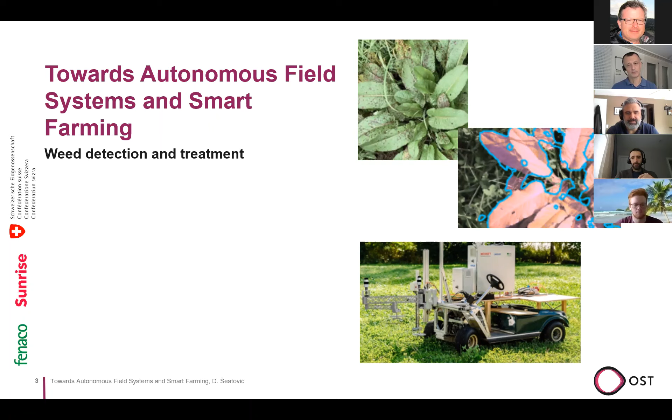What I'm going to try today is to give you kind of an introduction into farming. Not that we are going to do any kind of herbology, but nowadays we know that the production of food takes really a lot of resources of our nature. And what we want to do is to show a use case, a quite complicated use case, which can then be scaled to bigger machines and help us get autonomous systems working on the fields. So conventional farming is on the edge of change. The paradigm changes in food production and also environment protection, especially in Europe.

Each farmer has to do some kind of weed control, and they do it nowadays with biocides or herbicides in this case. And they are searching desperately for new tools where they don't have to put poison in the field. Then automatic weed detection, that's a topic which is more or less as old as computer vision. And we know in the 50s, people thought that in 10 years the computers would think as humans, which we still don't have.

But what we have now is the technology and computing power to put new generation machines on the field so that we can achieve a similar productivity level as conventional farmers do, but not on very, very large fields. This is still a domain of conventional farming. And I will show you some building blocks of our autonomous weeding system and the challenges which are there.

And there are not few, there are many. Then I'll give you a little glimpse into our new project, which started this autumn, on how to make money with a weeding system. So let's see first, what is conventional agriculture?

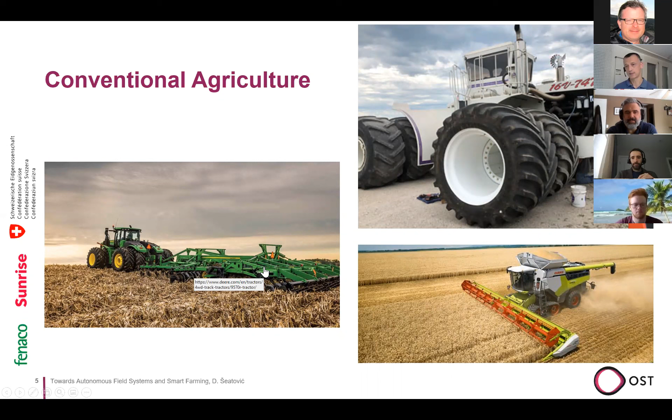Then, as I said, we have weed treatment, which is spreading herbicide in the field. What you see here is a new machine from the company Agrifac, which has smart nozzles. Those smart nozzles apply herbicide on the exact spot identified by the farmer. When the farmer says, do this on that spot, this is where you're going to apply the herbicide, they do the application. They use GNSS antennas to precisely and accurately determine where the weed is located, and they spray. Those sprays are not exactly saving herbicide, they spray quite a lot. You can see almost the whole field is wet from the application.

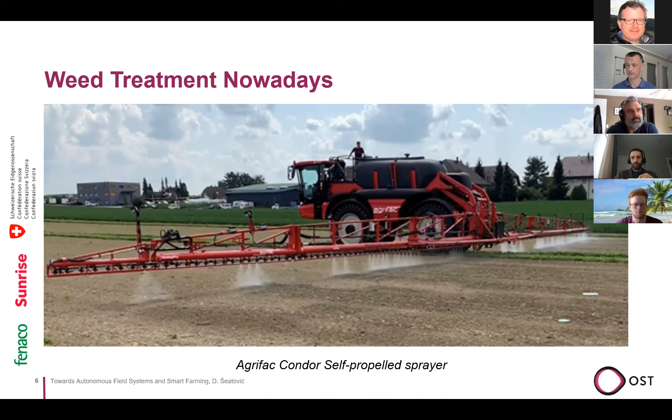So this is called precision farming. Well, precision means you can see within half a meter wide, so that you still get the plant or the leaves processed. In the end, it saves maybe 30% of the herbicides during that procedure. However, it's an improvement. Now each farmer has to make a decision.

Am I going to do conventional farming, or am I going to do organic farming? Conventional farming allows big scales, a lot of production, massive food production, or whatever kind of production is needed. With mechanization and automation, which I just showed before, those farmers can really produce for very little money. We'll see why.

The field machines are all steered by GNSS, and companies like Claas and John Deere cover the whole chain from planning, seeding, plowing, weeding, and then harvesting. Everything there is made to be as effective as possible with as little human interaction as possible. So they are assisting systems. They are big, and they compact the soil quite strongly.

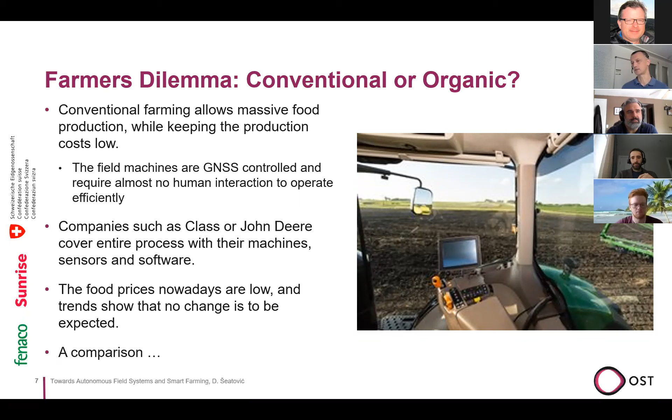And the farmer must produce more and more food, or more and more of his products, to keep his enterprise alive, since food prices are very low. And there's no trend showing that conventional food production prices are going to increase in any way.

Even more astonishing is where wheat production actually happens, especially in North America, where labor prices are not that low, like in South America, Africa, or China. Still, Russia also produces a lot of wheat, and labor there is much cheaper. But I mean, $6.50, and for what, 50 years? This is kind of weird. Everything else gets more expensive.

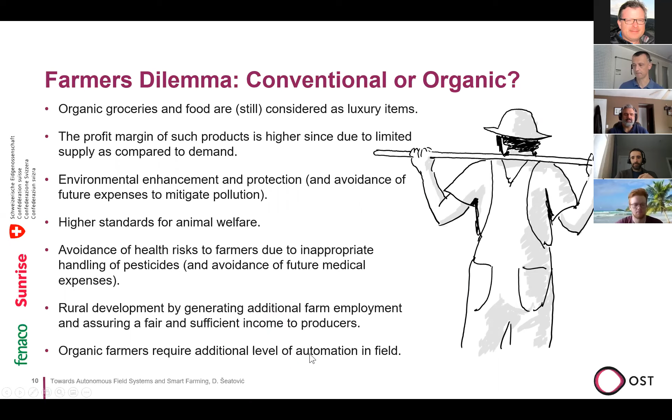But if they want to really be competitive, they need an additional level of automation in the field. Now, what can a farmer do?

He can do arable crops, which are really large fields like sunflowers or wheat. He can do vegetables or olericulture - this is a kind of a little bit more trouble, not so easy to harvest, so you have a lot of manual labor inside. Or you can produce meat, which is nowadays also a little bit bad, but still you can just put the cattle on the meadow and sell the meat there. So it's quite good income for doing this.

But if it comes to wheat, and the farmer has to assure that the weed is not competing with his product, then he cannot compete with a conventional farmer. A conventional farmer can do 5 hectares within the hour, and an organic farmer needs like a week for that. So how can we enable that?

So let's do it a little bit animated. Whenever we get on each of the sites, we get weed. And weed control is crucial for any cultivation art - it's almost as important as fertilization. And if they fertilize and have competitive weed, then the weed will also grow faster. So we need to keep the weed as low as possible for as long as possible.

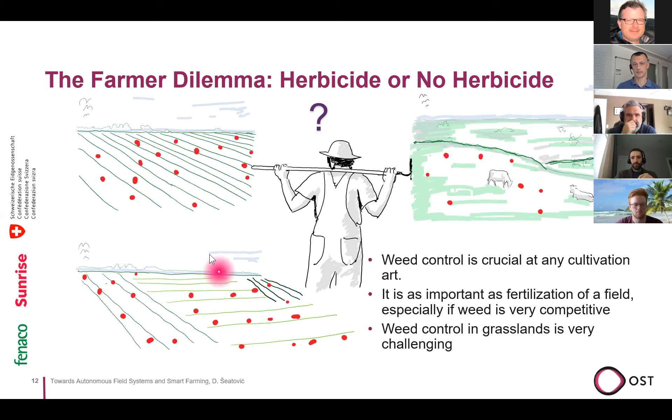So we started that in 2006, and we thought at that time that passive sensors - so a vision camera - was no go; they give us more reliable, more accurate data. With passive sensors, we shouldn't go there. Then we had a good effect if we have a third dimension, so we can actually better segment objects from the image.

We can estimate the surface of the objects or leaves in the area, because then we can distinguish which plant is what, based on the shape of the leaf or of the patch we're seeing. And with that, we can also see certain features on the field which are not actually seeable on a simple vision camera. We use a lot of hard-coded algorithms and manual feature engineering, and we saw no GNSS necessity, so it should be kind of a real-time system.

Now, how was that? So we use a flatbed scanner to get our samples. We used the flatbed scanner, then we created a blob. Then from that blob, we extracted the border.

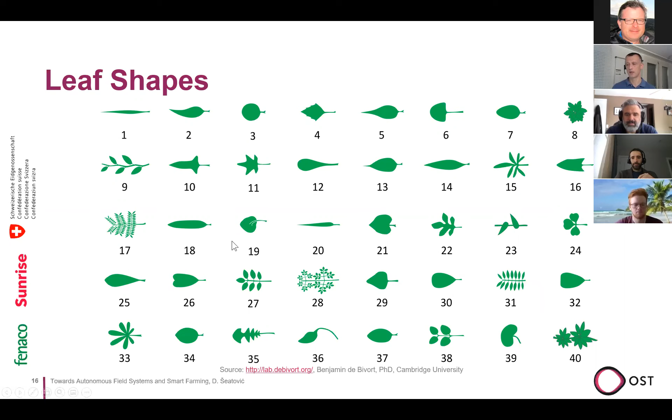So we had the different leaf shapes categorized into 40 classes. And then we did the analysis of how much and how well those shapes can be distinguished from each other. So simple analysis, the Mahalanobis distance between the leaf shapes from those feature vectors, gave us a quite...

So this distinction between the leaf shapes is promising. Then we saw the features - these elliptic Fourier descriptors, they give us just like a power spectra of the curve.

And then we saw, well, the correlation between those features is not big. So the first 10 are really good to do the discrimination. And the rest of them, they have such a high correlation that we might want to neglect them for our machine learning.

Those days we used the support vector machine, and it might actually make us more noise or more trouble than actually use. In the end, we used 35, which was kind of a middle decision - that's where we stopped actually.

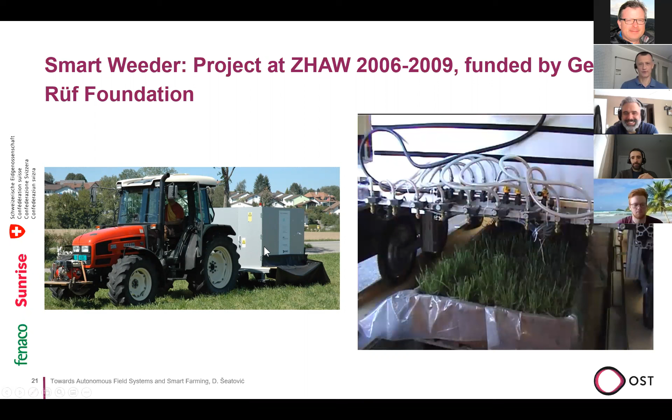So this vehicle which you see now, this was our Borg vehicle. I call it that because it's a kind of a cube, and it was like 300 kilos heavy, and we had a really strong laser inside, so that everybody had to wear our glasses just to do the measurements.

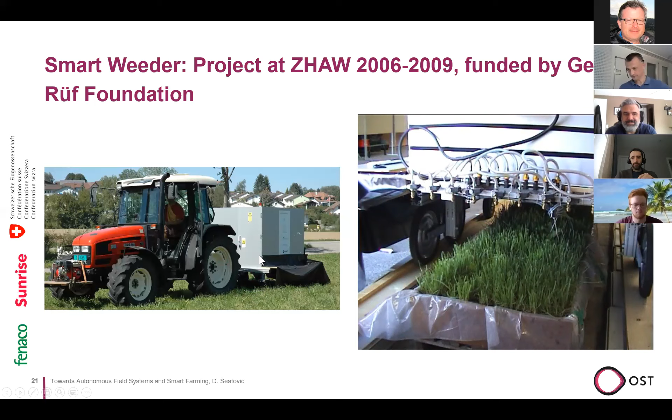And when we analyzed that, the algorithm was able to extract certain patches depending on their size and orientation. And then we extracted the boundaries, and then we got the matching, and some things where they were really near to each other didn't fulfill all the conditions to say, okay, this is a kind of weed leaf.

But when we discovered at least one weed leaf, we could say, okay, in this area, other candidates might be there too. So we were really detecting more than 85% of the plants by detecting more than 65% of the leaves.

So it was, let's say, disappointing. Disappointing also that we didn't meet the speed which was necessary - it was 1 meter per second, so we were like 0.7 meters per second. And what we had trouble with was the computation power in the field.

Yes, that was really a showstopper, because our computer wasn't able to just process the 4 GB of data per second doing all these computations. And yes, the sensor lacked reliability. So that's why we actually thought, well, that's a nice idea, but we have to wait for better sensors. And the commercialization of such a system was, let's say, impossible.

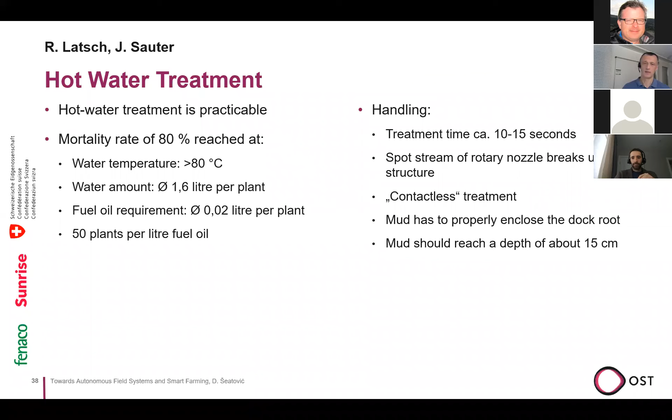This spot stream rotary nozzle is really necessary because it breaks the ground and propagates the hot water into the root. We have to dive 15 centimeters deep and then actually boil the plant. If you get the temperature above 80 degrees, the plant dies. Then they optimized that unit with 2 nozzles and a rotating system, so that we can drill the hole with a hot water stream, with 130 bars or 13 megapascals at 90 degrees Celsius coming from those nozzles simultaneously. Now, we are developing a new, more convenient treatment unit, which will be much faster, and we assume we will get 5 to 6 seconds.

We will be able to kill each of those weeds, and we can scale it in size. And now what we also developed as student work: we developed a new SCARA robotic system, also ROS-based, where we can use this arm to position it over the plant.

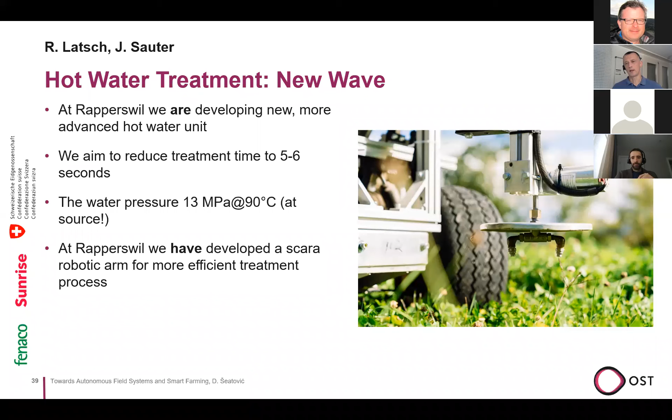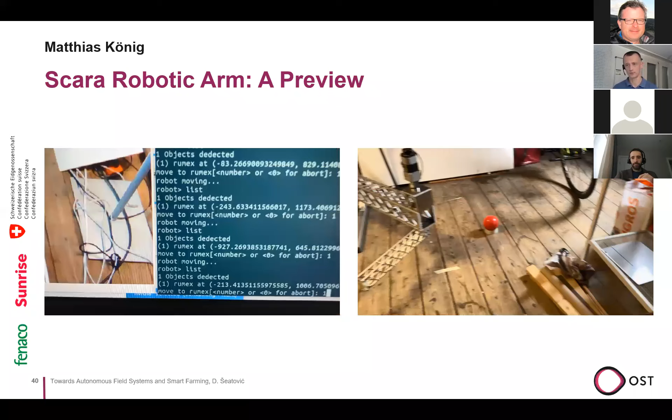Why we did this is that navigating a 900 kilo vehicle 3 centimeters accurately over the plant is kind of tricky, especially if you have Ackermann steering and so on. So it's not very convenient to do this. But what we can do, and we couldn't go into the field, so this was kind of a proof of concept whether the arm is really positioning very well.

So also we have a concept of root tracking developed by Damian Schori and the same student which you've seen before, which means we are able to track the roots from the video. So we can use a very cheap system like the NVIDIA Jetson Nano or any other inference system to track the position of the root in the image, and with certain information, maybe a 3D time-of-flight sensor there, we can actually project that into the robotic arm space.

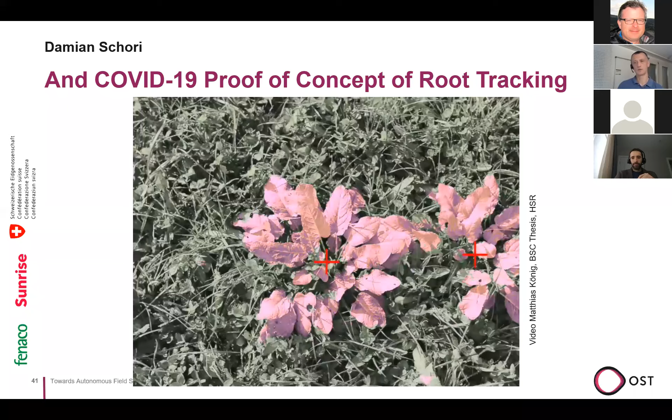And having that projected, we can do this detection also online, so without the UAVs, but we can also accelerate the processing time, since we position our vehicle near the plants, and then we can do processing on each plant with the robotic arm. This makes the whole story much easier, since the arm has a reach of approximately 1.2 meters.

This robotic arm can withstand 800 newtons of force, so it's a kind of robust technology which we need in the field. And we can put 40 kilograms on the tool tip. So we also have a sufficiently fast robotic arm. It can move not very precisely, but fast enough that we can actually say, all right, we have a proof of concept. If you want to do this speed and weight optimized, then we have to start another project.

But still, we are able to position the TCP, the tool center point, using this static camera visual servoing system so that we are really 3 centimeters above the root of the plant. So the main gain of this is that the vehicle doesn't have to navigate 3 centimeters accurately.

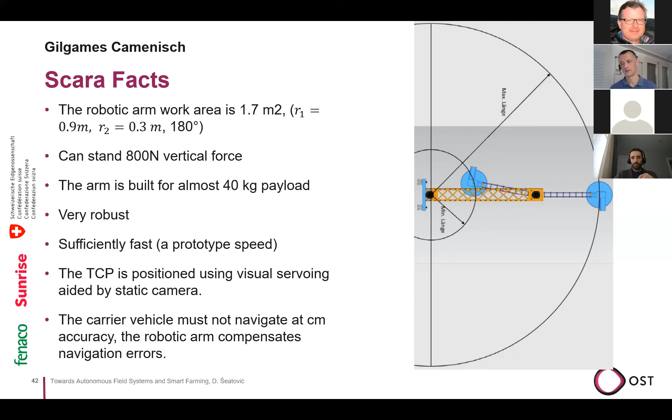And if we bought those elements at industrial partner prices, it would be kind of double the price. But with 1,500 hours of student work, we have a position accuracy of 3 centimeters, so we know our position and orientation 3 centimeters accurately. But you don't need that, because we need just 30 to 50 centimeters, depending on when the occlusions come and so on. So it's not a big trouble, because our SCARA robotic arm can do this.

Our biggest trouble is strong EM interference, because we have 400 volts here, and the controls and everything here interfere with the GPS signal. And really controlling this vehicle autonomously when it drives over the meadow is really challenging, the speed is really challenging, because it works mechanically, but we are mechanical engineers.

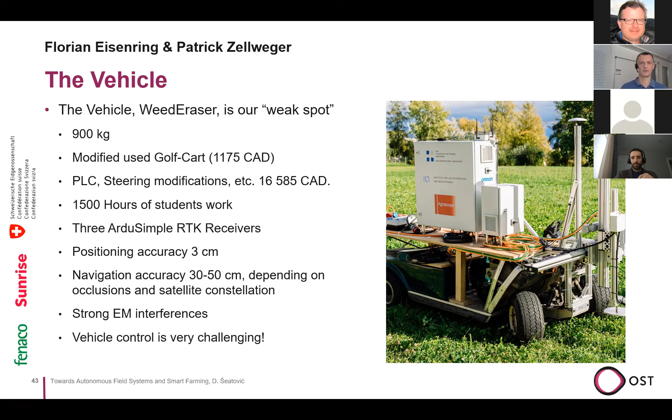Because we want to use commercially available systems. We want to use off-the-shelf components, because this makes our system cheaper and more convenient, so that we can spread it around. But we have a lot of open issues, considering the motion blur and image resolution, autonomous UAV, so that it can fly away autonomously and come back, and UAV-UGV interaction.

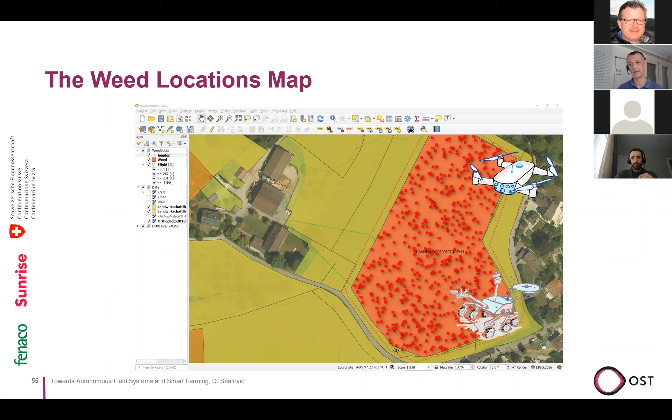And we hope at the end of the project that we will have a kind of autonomy, so that we can switch from manual, organic or semi-organic weed treatment to automatic weed control, or at least humanly assisted weed control, where the farmer is just sitting in a sun chair, drinking his beer, margarita, or water. And if the system needs something, it just sends him a message: look, I don't know if this is a weed, can you tell me, so I can treat it? Otherwise, I go to the next weed, which we can do with this technology nowadays.

And then the farmer, who is kind of married to his field, we can make into some kind of a Roman emperor. He can say, okay, this plant lives or this plant doesn't live for the next few weeks.